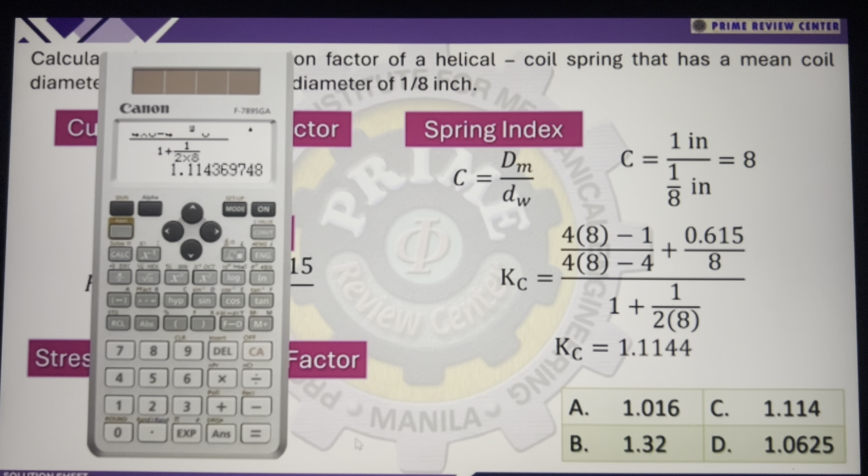So, meron tayo dito 4 times 8 minus 1 over 4 times 8 minus 4 plus 0.615 divided by 8. Then meron tayo dito 1 plus 1 over 2C. So yung C natin is 8. So pag na-press natin equals, makuha natin yung value ng ating curvature correction factor, that is 1.114. Yan yung letter C natin.

Sige, so another problem regarding sa ating spring. Babasahin ko lang. Combination yung mga arrangements ng spring. So 3 extension springs are hooked in series that support a single weight of 100 kilograms. The first spring is rated at 4 kilonewton per meter. The other 2 springs are rated 6 kilonewton per meter each. Determine the equivalent stiffness of the 3 springs.